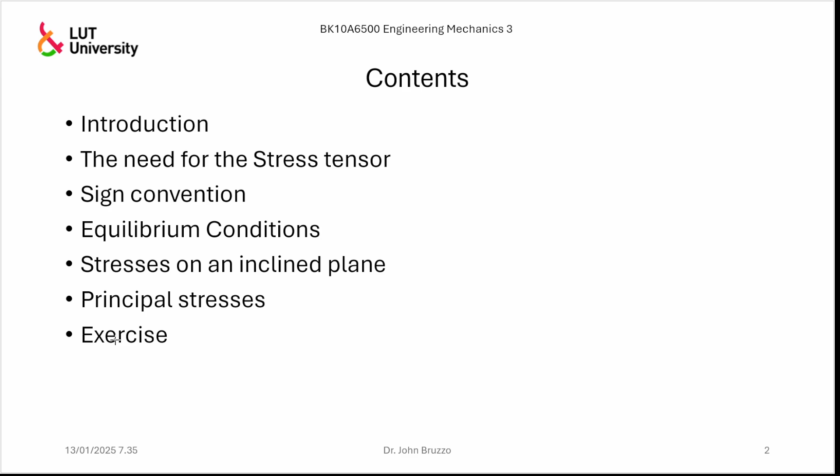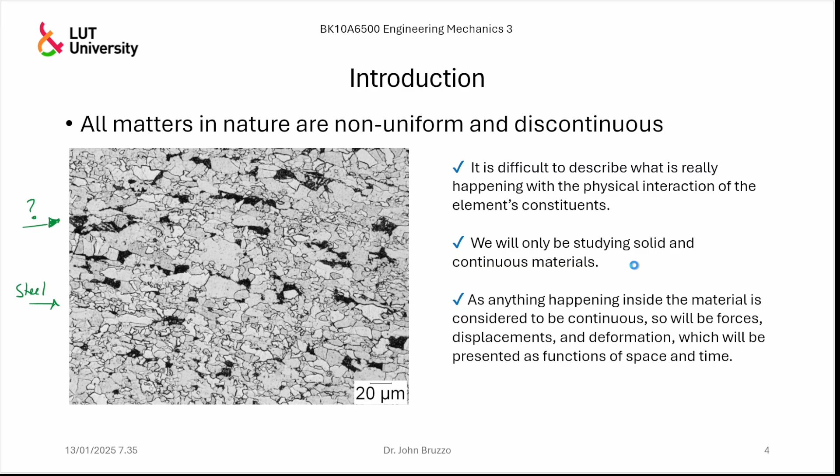And what you would do is cut a piece of steel, and let me see if I can pull up a picture. Metallography... let me see. Like this, yeah, this is a pretty good picture. I'm going to put it temporarily here.

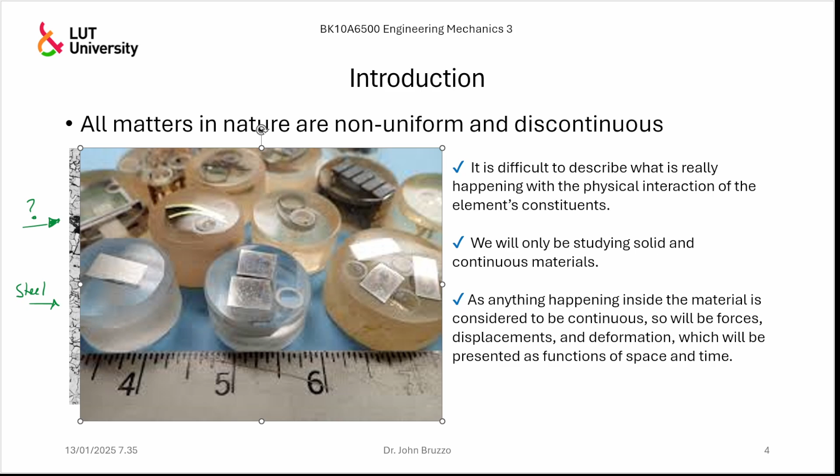So you would cut a piece of metal, the one that you wanted to study, and basically cut it and embed it in this resin, an epoxy resin, and then polish the face, mirror polished. Then after that, you would put some liquid, some chemicals, a reactive, which is a kind of oxidating or corrosive agent.

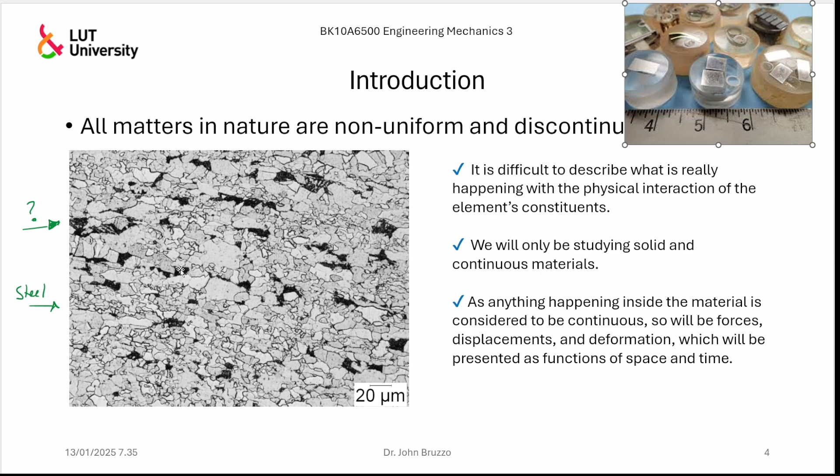And what you would end up with, after you put it under the microscope — yeah, my computer is lagging a little bit, we put it here, nice — it would be something like this. So this would have different shapes, typical shapes, typical sizes, and you have these black parts here, these small lines. If I make a little bit of a zoom... no, I cannot zoom it.

Actually, I lost it, if I go up or down. So a little bit of these kind of things.

So these kind of gray areas are called grains. These are the grains of the material. This is what forms the material itself.

And then these spaces are called interstices or something like that. And you can see that a material is not completely continuous. So all matter in nature is not uniform and is discontinuous. So what we see as steel, as a shaft, as a beam, as any machine element, at a microscopic level is something like this.

Yeah, so it's not continuous, which means that this may be a little bit difficult to understand what's happening with these materials once affected by a load, a moment, a torque, or something like that. So you just start getting the grip of it.

More interesting about this process is that depending on the thermal treatment that you apply to the steel, you're going to have larger grains or smaller grains, and depending on the size of the grains, the size of these impurities, you're going to have certain characteristics on the steel that determine, for example, the strength of the material, the elastic properties of the material, and so on.

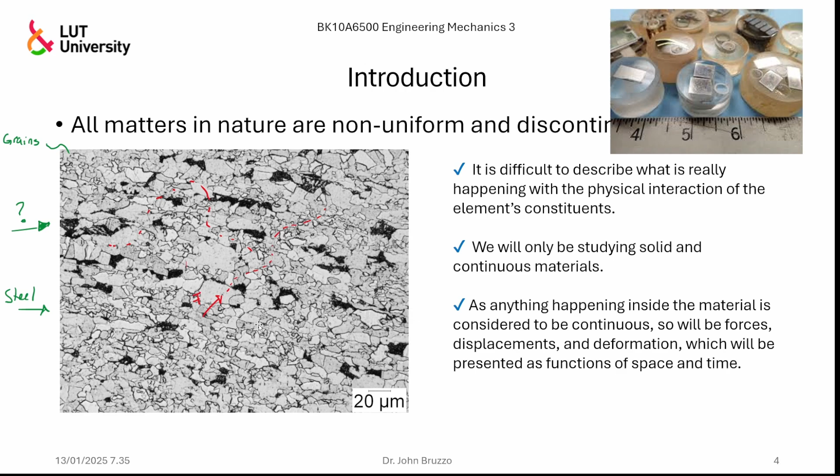But now the question is, okay, I made those assumptions to reduce complexity, but how then can I predict that something is going to break or not if I'm neglecting the obvious fact that this is not continuous? Well, then we jump to something called the phenomenological approach of studying things.

So what engineers are interested in is something called rheological properties of the material. Rheological behavior is basically the capacity a fluid has to deform or to flow. But then when you apply this to metals, for example, you're basically saying what's the capacity of this steel, this solid part, to deform. We can take the rheological behavior of a fluid and decontextualize it, applying it to a solid.

But now, the phenomenological approach means, let's imagine you have a black box, which is your machine element, the part, the shaft, or anything. And then you are going to apply some loads, one force here, another force here, and maybe a moment around here. So you don't know what happens inside of this.

But then what you have to do is ask, what are the consequences of this? What are the consequences of applying those forces? Is this going to deform or something? Well, if it's going to deform, then you can see right away what the consequences of these forces are. So the phenomenological approach means it doesn't matter what happens inside. What matters are the consequences of the forces in a visible way.

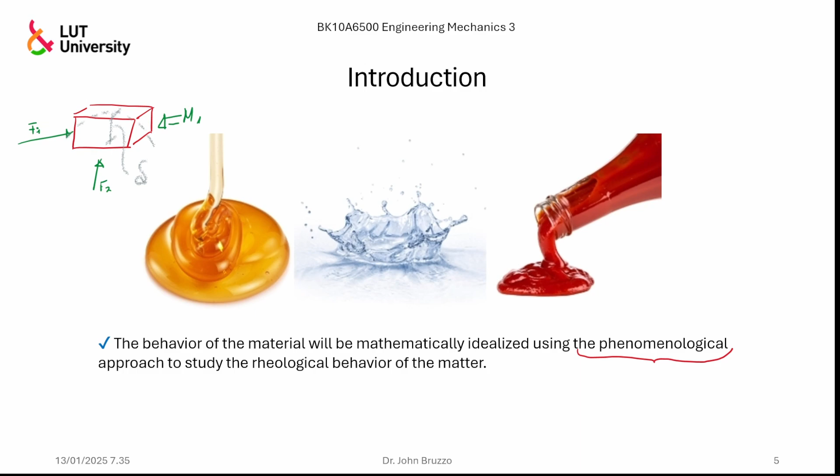This is a pretty fine picture, let me bring this one here. A couple of pictures I'm going to bring. This one is too big, so let's put it like this. This is a tensile test performed by this machine, or a machine of this type. Let me bring the machine, this one here.

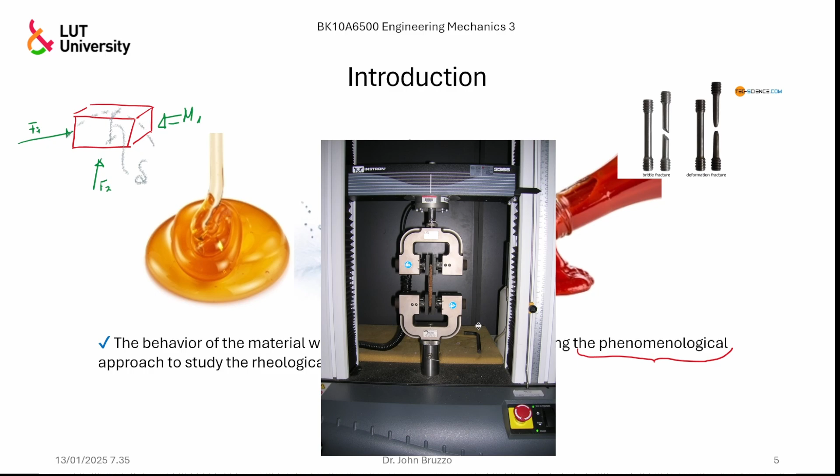So you put this test specimen in between these two clamps, and then you start pulling apart those two clamps until it breaks. Depending on the type of material, whether it's brittle or ductile, you're going to have a different type of breaking.

But just by looking at that, I apply some forces to this test specimen. For example, tensile would be a tensile force here. So I apply a certain amount of force, and it failed like this. They broke, and we say this is what's going to happen. So this is the way we engineers approach many things when we don't know what is exactly happening inside of the piece. That's what we call the phenomenological approach.

Do you guys have any question before moving forward?

So this is the way we approach things, or many of the things. And I don't know if you have noticed this, but this is a pattern that keeps repeating in your courses, that well, we don't know exactly what's happening there, but we do know that when we do this, this happens.

Now, this state of stress is represented by something called the stress tensor. But then I don't know if you've had a chance to see what is a tensor. And basically, when we try to describe numbers in our mathematics applications, we can deal with scalars, which is just a number.

Now, when we talk about vectors, it's kind of like we are augmenting, increasing the information a number can give us. For example, this gives us just a number, but vectors don't only give us the number, they give us something else, like: this rocket is traveling at 1,000 kilometers per hour, and not only that, it's traveling in this direction. So it's kind of, if this gives me the name, this gives me the last name. Name and last name. So imagine, look at that. This is the way it is represented.

But then we got matrices, which is kind of like if we group a bunch of people and say, well, this is John and this is the last name, this is Tommy and this is the last name, this is Joseph and this is the last name. So you start piling together vectors.

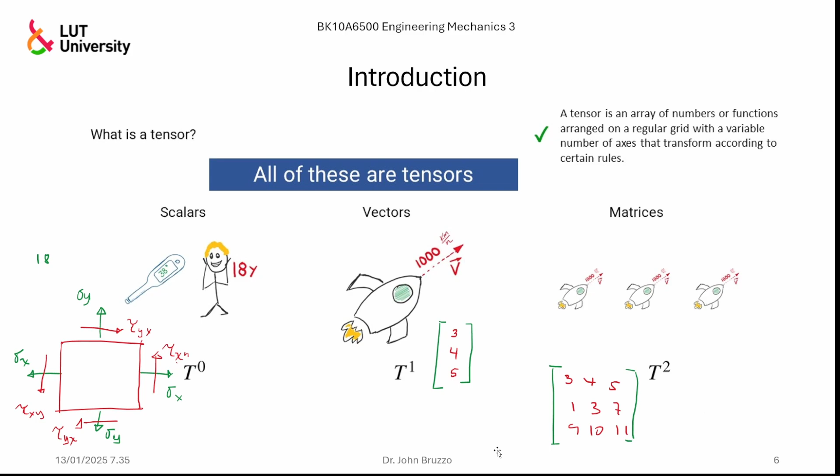So why are we taking a look at this? Is this important? Is this something that I might use in the future? Well, if you're going to work in design regarding mechanical engineering, or your work in the future is going to be involved with research of failures, or designing mechanical things, you need to know a little bit about this. As I mentioned in our last class, we need to be aware if something is going to break, or if a material is going to fail.

I define for our course, you can take any other definition if you want, but the one I choose is that something is going to fail if it breaks or if it deforms beyond usable range. If it breaks, obviously that's not going to work any longer. But if it deforms, the integrity of the part might be okay, but it might not be usable at all.

And what do I mean by that? Because we have a body of standards or situations where we can say that if the deformation is more than this, then this is not going to work. And what do I mean by this? So let's imagine that we have...

Let me see, a beam. So there's a beam here. I should try to use the ruler so it makes a little bit more decent lines. So imagine that you have a beam here, like this. And this beam, doesn't matter how it's supported, but it's supported somehow to the ground. So let's say that this is a simply supported beam.

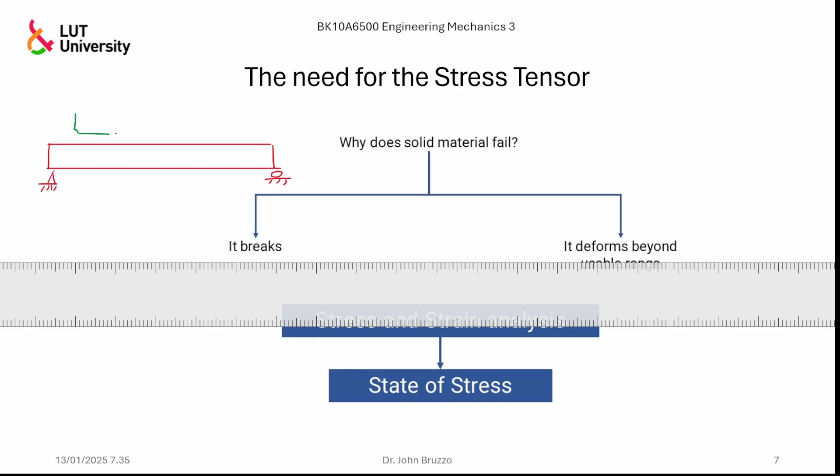And let's imagine that on top of that beam, which is part of a floor of a factory, you have a motor. I'm going to try to draw a motor here, electrical motor, something like this. This is the shaft. Then you have a coupling, something that couples the rotatory movement of the motor with, maybe, let's put it this way, maybe a pump, a centrifugal pump. So something like this, and this is a motor, and this is a pump.

And this is part of some design you're doing. But what about when this motor, let me write a little bit more here, has some vanes that help with heat dissipation, and then you have this one here. We move this just a little bit, I just wanted to move it like this. Yes, and then I have this one here, there's a pump.

So what about if when you mount this equipment on the beam, plus the other equipment that might be there, this beam deforms like this, where if I make this line like this — it's so sad I cannot add more of this — if this is the neutral line, so this is going to deform something here.

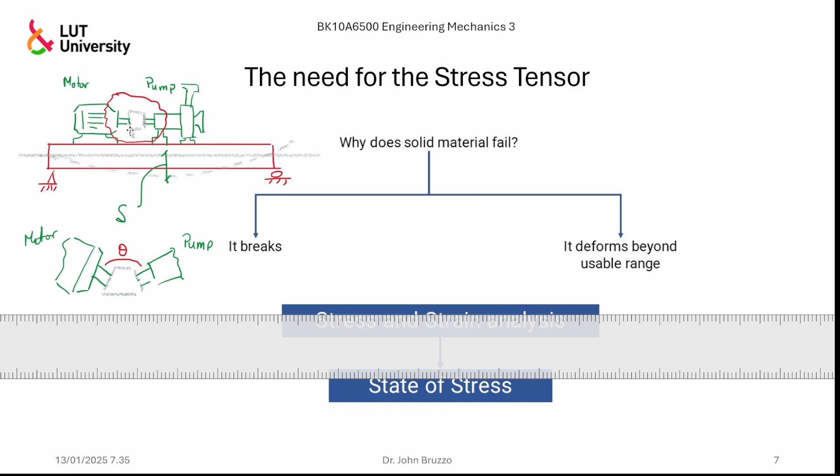So this is why I have defined failure of a solid material. If it breaks, you can see right away that it broke. But if the deformation is the correct one, it doesn't change the limits, it doesn't affect the functioning of the machines.

There's a body of standards that tells you, if you're going to calculate such beams and mount certain things, try not to exceed these maximum limitations. You have to take that body of knowledge - those are experiments, experience-based information that you bring in. You say, well, in the past this has failed, if it works under these conditions, we need to change it. So this is why we need to understand this.

And definitely this is a combination of what stresses are, strains are, and then that forms a state of stress. What questions do you have?

Let's continue. Let's continue then.

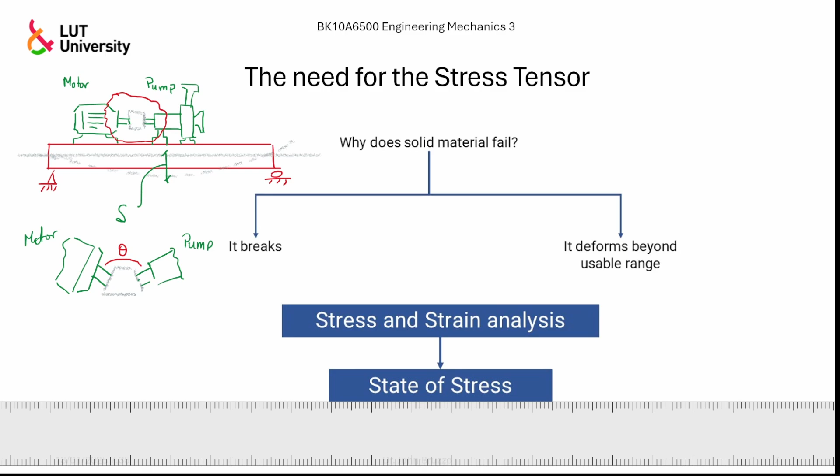And how do these react? Because these are internal forces here - these happen to be the internal forces that are keeping the material together. So how are they holding up? Are they strong enough, or are the forces larger than the ones they can support? This is why we need a stress tensor.

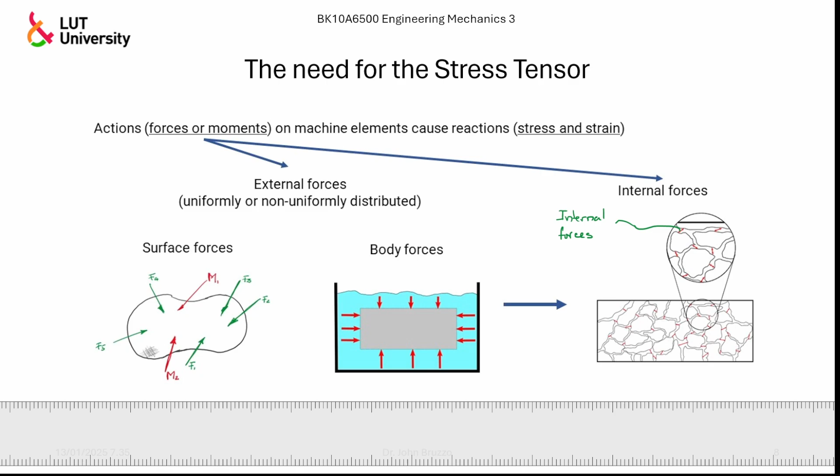And then you say, well, is this enough? Is this going to fail? To understand if it's going to fail, I need to go to the inside of the material and pick a point and see if this is going to fail or not. I need to see what the stresses are at any of these points, in here, or in here, or here, or any part. I need to check if the stresses generated or developed in any of these points is larger than the strength of the material, and then the material is going to fail.

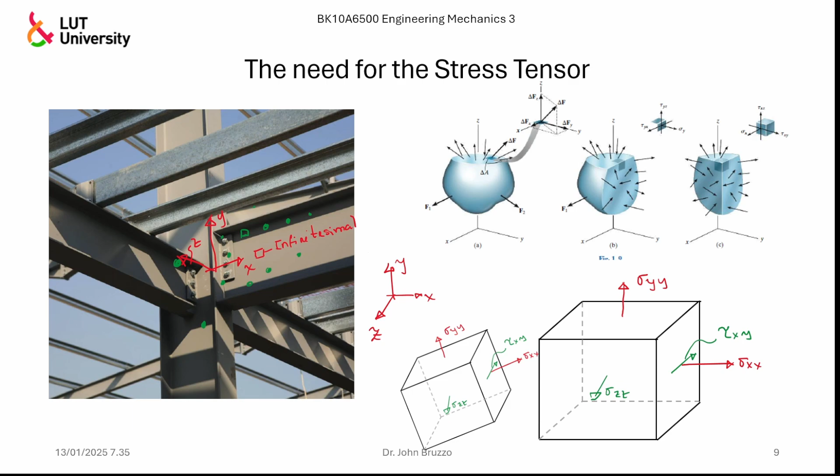This one here, copy image, and then this one here. So we start using software, and this software, for example, finite element analysis. This is instead of a support, or kind of a pin handle, or something like that.

And then what you do is start dividing the part into different points. So each one of these parts is a point where the finite element software is going to calculate stresses. Yeah, these are points.

So you say, well, why is this? Well, you know what, these are points, but you don't need that many points in this area because this part won't probably fail here. But please put more points in these areas, because this is where most of the time this fails. So you want to make sure that you get the point.

And then this can be as dense as possible, meaning you can put millions of points here and run the software. And not only that, the beauty of this is that between two points, if you study finite element analysis, there is something called interpolation functions that tell you, more or less, the stresses can be approximated between two points if we consider that this happens and so on. So you can have a guesstimation of what the stresses are in between points.

And then you get these beautiful images. Let me bring another one, for example. Yeah, this looks nice.

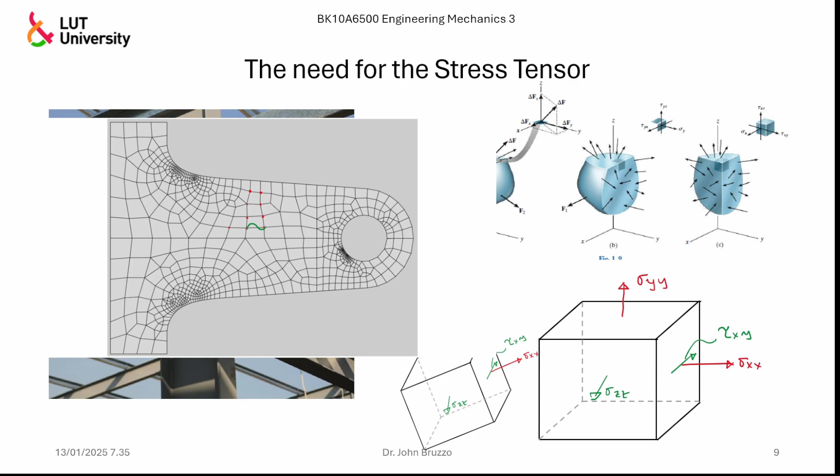Copy image, let me get rid of this one. Something like this, you see, where you are color coding - for example, red is where the most stresses or deformation are, and so on. You see, for example, in this case, near the hole here, and then this part, maybe because this is being bent or something like that. So we start using that, and then we start delegating this whole thought process of where should I calculate stresses to the software.

You would tell me, but then why do we need to learn this part if we have software that can do it right away? Well, the reason for that, my friends, is that if you don't know this theory, you could be assuming and trusting blindly on what the software is doing, and then whatever results the software tells you, you're going to consider is the truth, which means that you are prone to make big mistakes.

For example, something advanced I hope you get to see in master studies if you continue with more research: depending on the type of forces applied, depending on the type of machine element, certain meshing - this meshing is the process of dividing this into points, like doing this is meshing - are more prone to tell you the truth than others. And then, for example, these triangular elements here can have problems with this type of application, which is going to tell you only half of the truth, and then you are going to blindly select this.

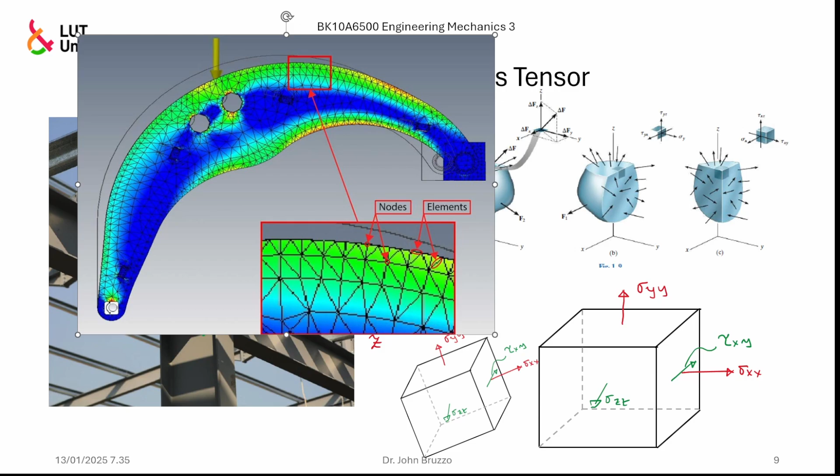So that's why you need to know a little bit of theory before jumping into software blindly to judge my calculations. So we need to do it by hand. And the good thing here is I'm going to tell you, do it here, do it there, and then you don't have to be guessing where to do it. Any questions so far? None?

Then how do I transform this into a tensor, a stress tensor? So imagine that we have this element. I'm going to draw this one here. So I have a normal stress pointing out this one here. I'm going to call it 10, and then I'm going to call this one 20. I'm going to call this one 30.

I'm not going to use any units. It could be megapascals, it could be kilograms per square centimeter - any stress or pressure unit can be used here. So, but I'm not going to write them down here.

Then, of course, because of the symmetry of all of these, they're going to have 10 also here. And at the bottom, you're going to have also here, you're going to have 20. And then in the back, like this, you're going to have 30. You see how this has to be in equilibrium - this is something we're going to talk about in the next slides. So this equals this equals this, and this equals this, because as this is a static structure, it doesn't move anywhere. So even though these stresses on this area represent a force, you cannot have different forces, because then it would mean that this might move and this is not moving. Even though there are certain considerations where definitely there is a difference between this and this.

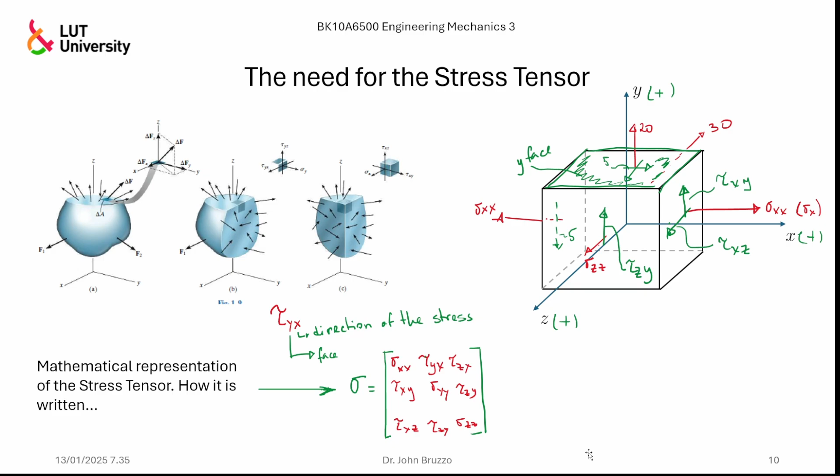It's pretty simple. Whatever is contrary to these two things are, let's say, negative. Why is it here? Let me bring this one here to have it as a reference.

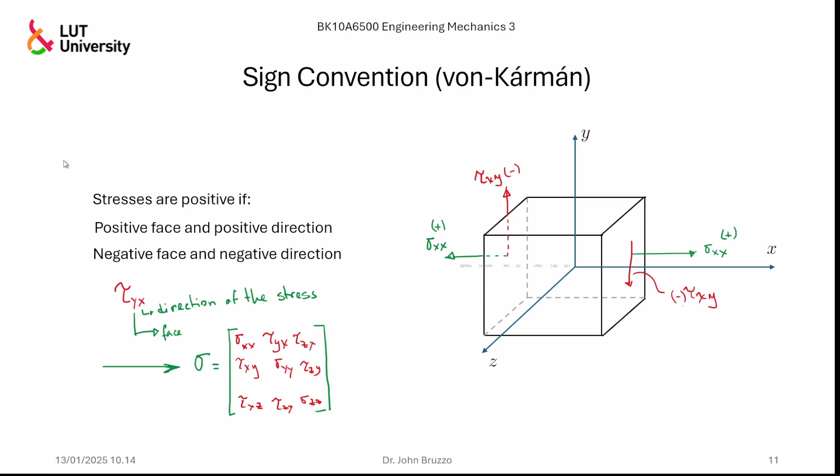So look at this, the arrows were pointing, look at the stress tensor, knowing that these, no, these dudes here. Actually, I should bring it again here, maybe. Yeah, I have it here. I'll also take into account this, right? So we can have everything in the same slide.

And see if this is the correct representation of this cube. You have just to answer yes or no. And you have 5 minutes since you start, so this is von Karman convention.

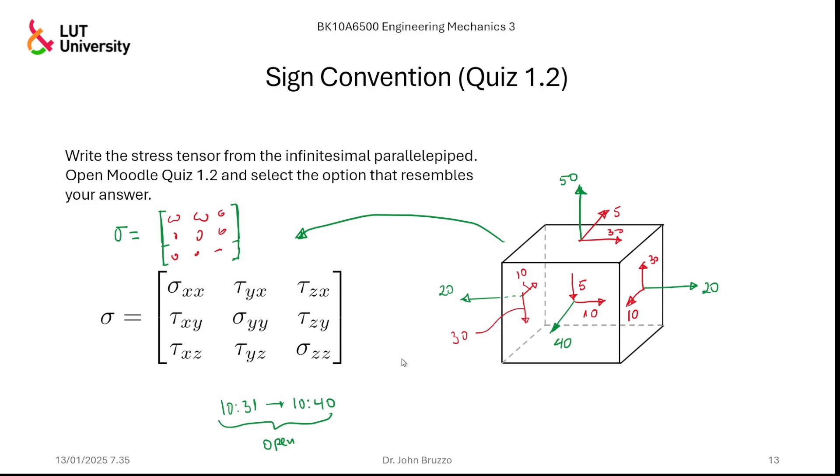Now, if we go to the second, let me bring here the image. You had something like this.

I hope nobody wrote down letter E because actually it does exist. Let me see... just two people got it wrong in this one. The rest got it perfectly. Nice, let's see.

Actually, the answer I believe is the first one. Why? Because this is sigma x, which is this one here. This is sigma y, positive, this one here. This is sigma z, which is positive, this one here. So perfect.

This one can match that one. This one matches that one. These two do not match the diagonal terms represented by the normal stresses. So these are a no. These are not possible, and these for sure are not possible.

Now let's take a look at the shear stresses. I know that these two are positive, but what about this dude here? This one is tau y z. Now it's in the positive face, but pointing in the negative direction, which means that this is negative. Look at this, and this one.

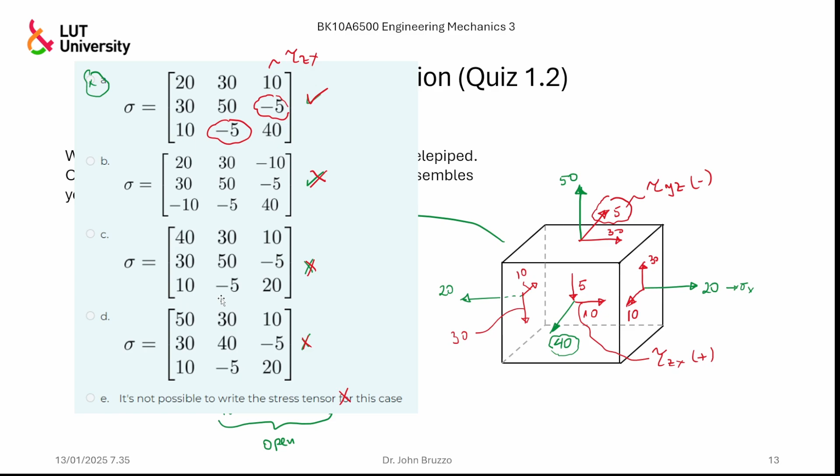Now, if you notice, let me bring back this, not this one, but actually I could take this screen capture of this one here. I can reuse this one. And let me crop it just to show what I want to show you.

I believe you noticed that when we talk about stress tensor, these terms are pretty much the same all the time. This term and this one are the same, and these two are the same also. So if you see patterns here, most of the time you see how these are repeating. For example, this one repeats here, this one repeats here, this one repeats here.

I'm muted. Thank you, thank you.

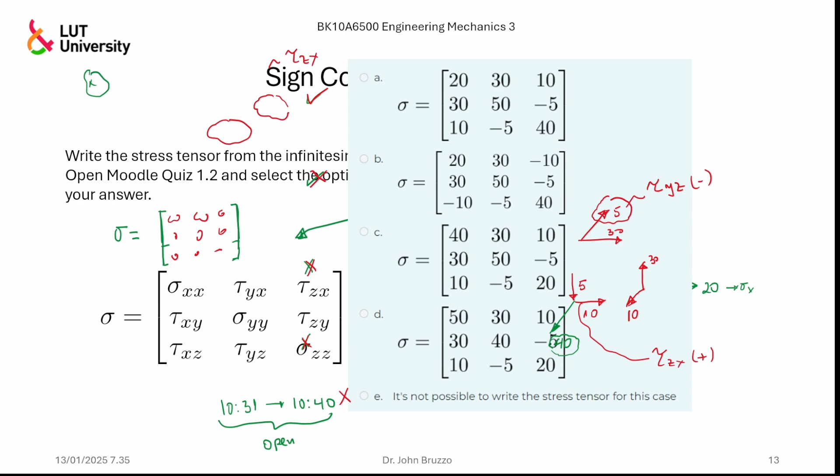Did you get to hear this explanation? I hope you did. Okay, perfect. Now, yeah, in this case, for example, these are a pattern that repeats in the stress tensor, which is that these two are the same, these and these are the same, these and these are the same.

And then I was mentioning that in this case, you see how the pattern repeats, that this one repeats with this one, repeats with this one, and then this one repeats here. So this is characteristic of a stress tensor. This value repeats in different parts of the representation of the stress tensor.

And that is thanks to something called equilibrium conditions. So when we apply rotation equilibrium and translation equilibrium, a few extra pieces of information appear. For example, if we apply rotation equilibrium - by the way, I'm going to leave a link to a video where the detail of everything is posted, if you're interested. I believe at this point it's not that interesting for you to know the minimum detail of things, but the most important things so you can apply them.

But even though the video is there, I did it for last years and previous years, and I noticed that it was too much. For example, if I take only the stresses that cause forces that can make this cube rotate about the x-axis - in this cube, only these stresses, this stress here.

For example, if this is the x, this one here is the y, and definitely this one here is the z. I call it dz because they are so small. This dude here, this friend, produces a force. Let's call it force zy, which is going to be that stress multiplied by dx and dy.

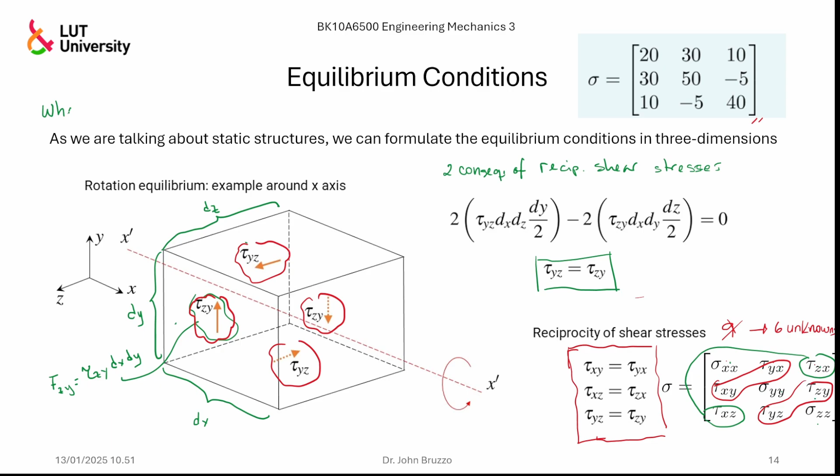What are the two consequences of the equilibrium rotation, or rotation equilibrium, in the stress tensor? Write it down because it's coming. So what are the two consequences?

The first one, the reciprocity of shear stresses. And the second one, that instead of 9 unknowns, we need only 6. This is the way you need to answer it. Instead, when you see this on the exam, just answer: reciprocity of shear stresses, and instead of 9 unknowns, we need just 6. This is for the exam, so write it down because it's coming. Any questions?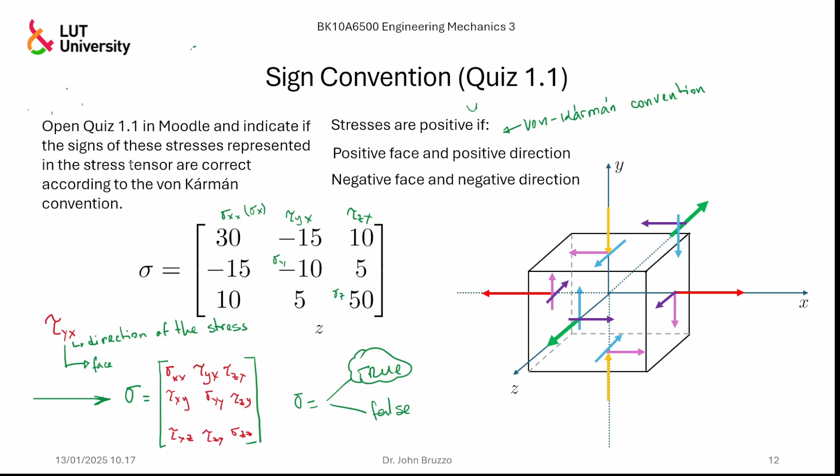Well, because in reality, let's imagine we're looking at a two-dimensional representation of this. If we consider this to be a point, we're going to have a stress here, and another stress here. But what happens with the adjacent point? Imagine this is the adjacent point, are we going to have this one here and this one here too, to follow the whole thing? So if we say these in reality do not change, like this... let me just get rid of this.

Then it would mean that for any structure, you would have to understand that the stress is going to be constant along the x-axis, and that's not the case. So if this is point 1...

And this is point 2, then if the stress increases from one point to another, most probably there is going to be an increment here, represented by this differential, which is going to be represented here with a different stress. So across the points you chose to analyze stresses, there are going to be differences in the same direction, and thanks to those differences we get what's called the differential equations of equilibrium.

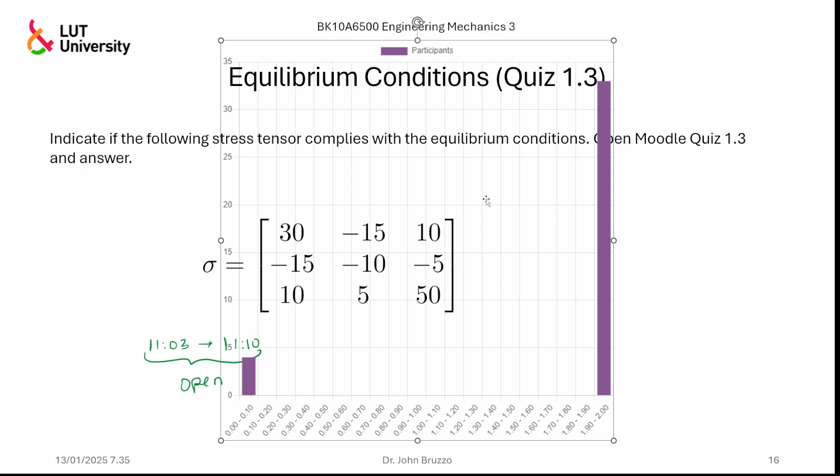All right, let's come back to this. And looking at the results, 4 people got it wrong, the rest did perfect. And the question was, just indicate if this tensor complies with equilibrium conditions.

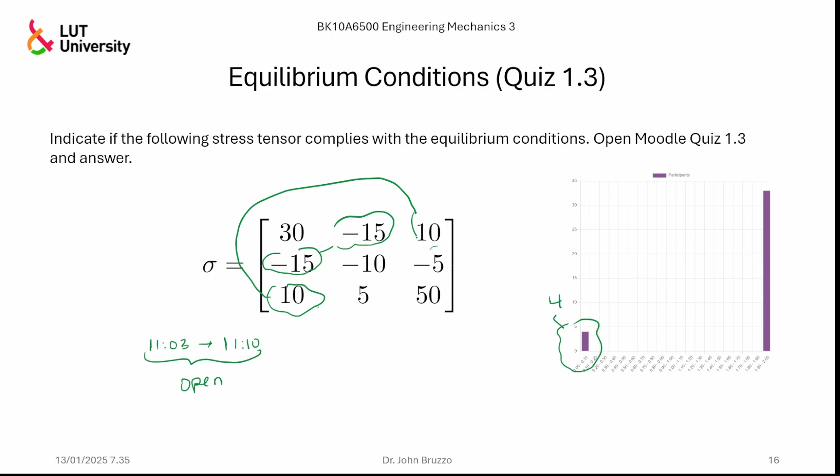And basically I mentioned, well, we're talking about rotation equilibrium. That's why I showed this. And again, this has to be equal to this, this one has to be equal to this, and this one has to be equal to this. And they are not, which means that this is false. This does not comply with the equilibrium conditions. It's just because these two numbers must be the same, and they are not.

So 4 people got it wrong. I hope you get the explanation why it's not true, why it is wrong. It's because of the consequences of applying the rotation equilibrium on a stress tensor, or on an infinitesimal cube, as you want to call it. So that's why this is false, because these two must be the same, and they are not, which means they do not comply with equilibrium conditions. Any questions?

Well, actually, there were more people answering, and 6 people got it wrong. Wow.

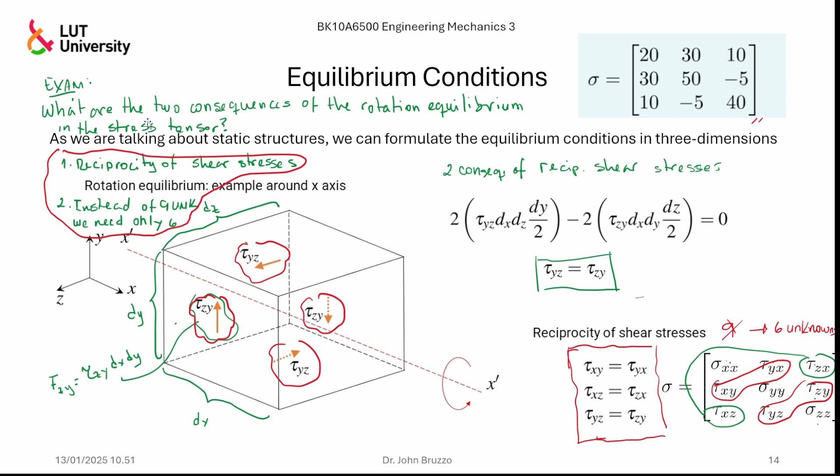All right, so let's continue. I'm already telling you this goes to the exam, so please write it down, because that goes to the exam.

We talked about representing this infinitesimal cube oriented parallel to the Cartesian coordinate system, but it could be oriented in a different way, and there could be infinite numbers of orientations. So why is that important to us?

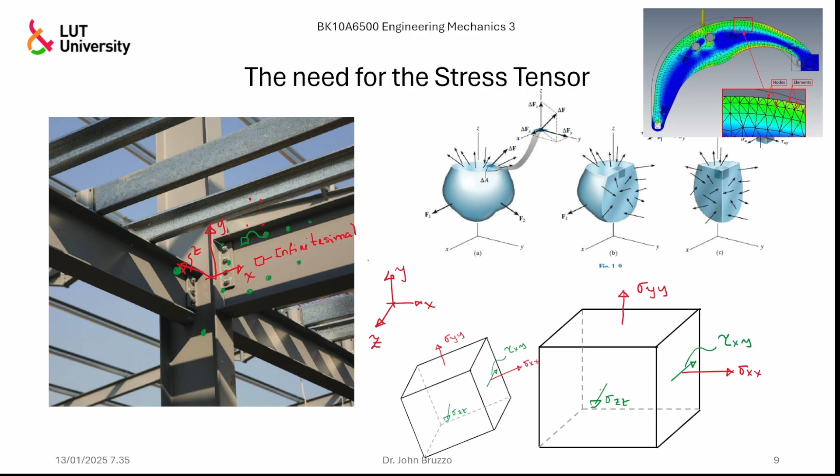To see the importance, we need to know how to express this stress tensor on a different plane than the one that we chose.

Imagine that you chose this stress tensor, let me copy it from here. One nice, maybe this one. Let me copy this one here. Now I want to paste it as a figure, as a picture, so I can shrink it if it allows me.

So I chose that one, but what if I wanted to understand what happens if I just cut this like this, and take a small piece of this cube, and try to understand what are the stresses after I cut this corner, the stresses formed in that specific plane.

That's the help of something called stresses on an inclined plane. There's more to it, and I will invite you to look for it. But not only do you need to know the orientation of the plane, but the orientation of the normals and shear stresses, and also how to represent that orientation.

Something we use here are these elements, this vector, called direction cosines.

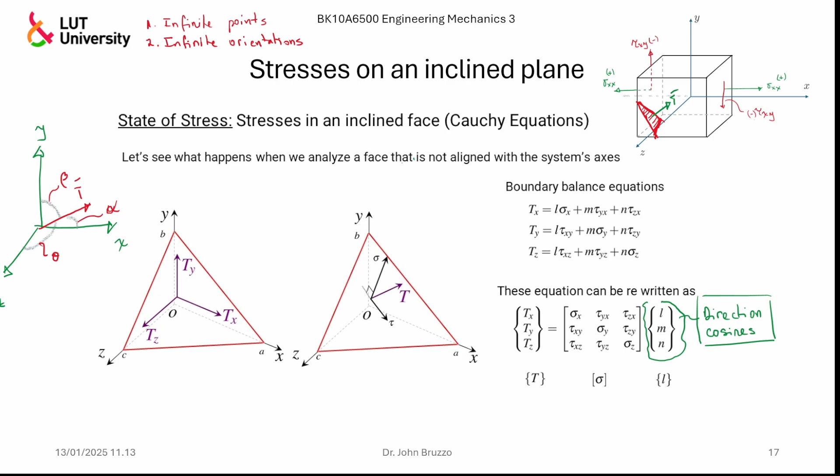Here there are so many that I cannot decide. Let's pick one. Oh, this is one. Imagine this is a brake assembly, with mesh and everything, and you're studying this part. So this is very complex, and I'm going to pick this point here, or in green to make contour. This point here, I don't know what's better, but this one.

Because you think when we're talking about analytical solutions, meaning doing it by hand, you think, well, I think that is where the maximum stresses are going to be, and I think that is where this thing is going to fail. So you pick this point, and then that point is represented by your infinitesimal cube.

But then you are left with the unknown. I know that's the place where it's going to fail, because typically this brake fails here, assuming this is true. But is this the correct orientation? Then you can start playing around with the orientations of this cube to see if these are the maximum stresses you can find at this point.

Because stresses, depending on how you orient this cube in space, you're going to get one value of stress or another. So this tool is allowing you to make sure that you calculate the maximum stresses possible existing at that point. So this is why this is very important.

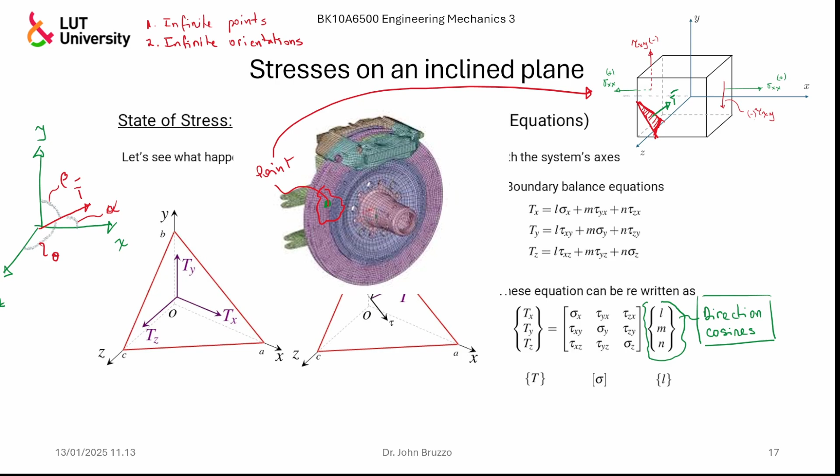Let me get rid of this and put it like this, in here. So that's why you not only want to pick the correct point, or the closest point to your assumptions about where the maximum stresses are going to be, but you also want to make sure the orientation you chose is the correct one. That's why this is helpful.

Then, of course, if you have a normal stress or a resulting stress, any resulting stress, you can transform that into a normal stress to the plane and a shear stress to the plane, using the projection of the resultant stress on the normal axis and the projection on the shear parallel axis. Applying these formulas is very simple in this way.

It's just a dot product of the vector you get here, multiplied by the normal direction, or the direction cosines representing the normal direction, and you get the normal and shear stresses in that area.

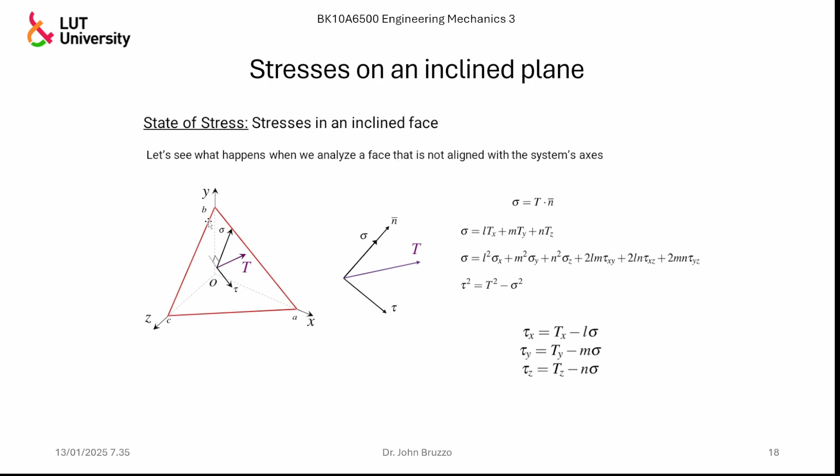But you're telling me, well, this is nice, but what's the point of this? It would be wonderful if I didn't have to go over a million orientations to see what's best, but if we could calculate, having this infinitesimal stress cube, what orientation gives us the maximum stresses. Because if you can give me the maximum stresses, you could take those values to the bank and say these are the maximum stresses, then use any failure theories we're going to see in the future to say if it's going to break or not. So that's why we need to make sure that at the point we're analyzing, we are getting the maximum stresses.

And that's where principal stresses come into play. Principal stresses are named like that because, first, if you have a stress tensor, I'm going to put it like this, the one that we already know: sigma xy, and I don't care about writing this in the correct order, even though I should, because I know the reciprocity of shear stresses is working in my favor, and this is yz. So this is my stress tensor that I calculated.

But there exists an orientation of that cube that, when you rotate it, transforms this into what we call principal form, a stress tensor of this form: sigma 1, sigma 2, and sigma 3. And all the shear stress values become zero. These are called the principal directions.

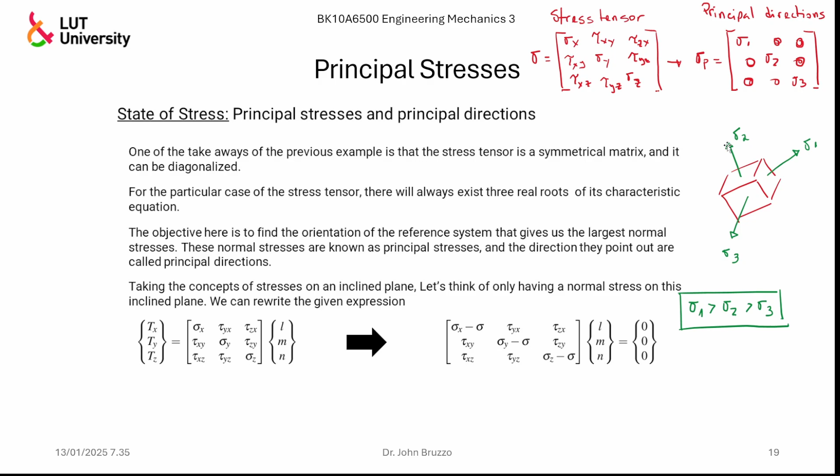How to calculate it? Basically, we know, and I believe it's written here, that the stress tensor is a symmetrical matrix. When I say symmetrical matrix, the lower half equals the upper half. That's a symmetrical matrix, and you can diagonalize a symmetrical matrix. They say it can be diagonalized, meaning you can find the principal directions. That's what it says. So how do we do that?

So I'm going to leave you this, but basically there is something called the characteristic equation of the stress tensor, that is this one. If you say, hey, I want to know what this vector is — this vector is a matrix like this, sigma 1, sigma 2, and sigma 3 — it has to be equal to this.

So it's kind of finding the solutions for this problem. Basically, if I put this to this side and subtract the matrices, find me the solution. Well, definitely the solution of this system of equations, meaning the values of these elements, is 0. It cannot be that these are 0, because one of the properties of the direction cosines is that they follow this rule, so they are never 0. So this is a trivial solution, it does not exist. The real solution is that the determinant of this matrix has to be equal to 0 to solve that system of equations.

When I form the determinant — and there is also a lengthy process on how to get to this equation — it says that you're going to find a cubic, or third-degree, equation where if you solve it, it's going to give you 3 real roots, meaning the 3 roots are always going to exist. So if you're calculating the principal stresses and get an error or some complex numbers, something is wrong. 3 real roots are always going to exist, and they're based on these variables here, I1, I2, and I3.

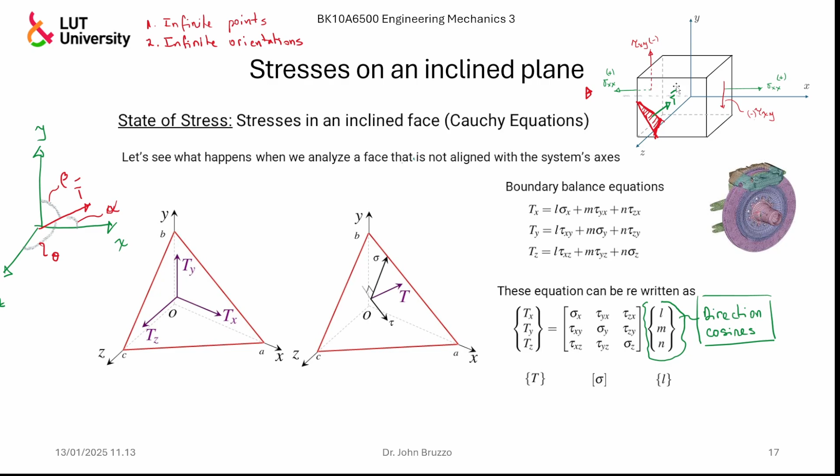All of this we've covered is just to tell you this: this is the way to know what are the maximum, the largest stresses at that point. Let's remember that a point is going to have these. If you change from that point to another location, this is going to be different.

Any questions so far?

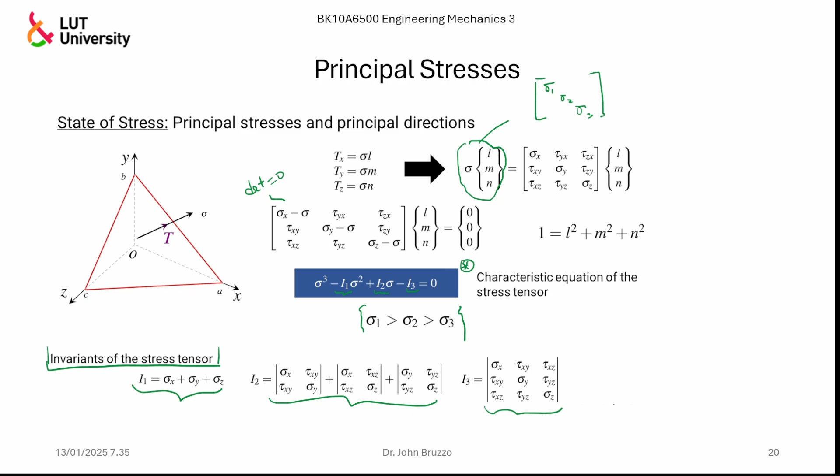So if you have a stress tensor that you formed by calculating the loads, the location, moments, and everything, you get to this stress tensor. And we will see how that's formed when we look at failure theories.

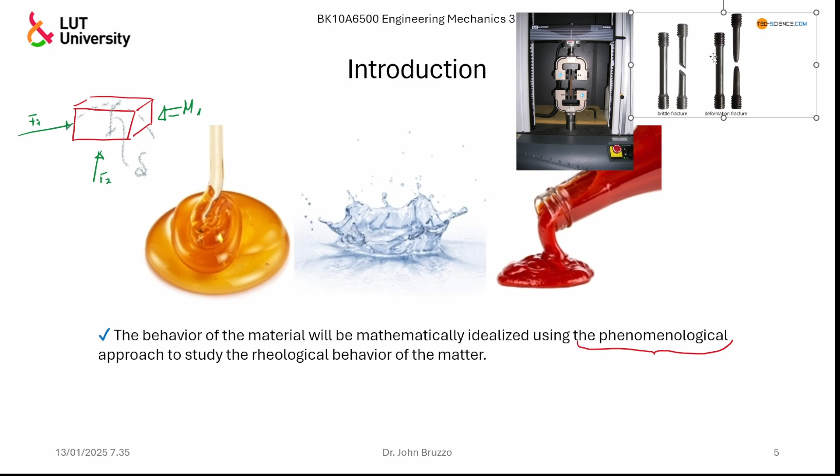One of the tasks would be to calculate the principal stresses, these ones here. Then, just to know the orientation and why the direction of those principal stresses is important. I bet you have seen this before when I show you this, but let's bring this image here.

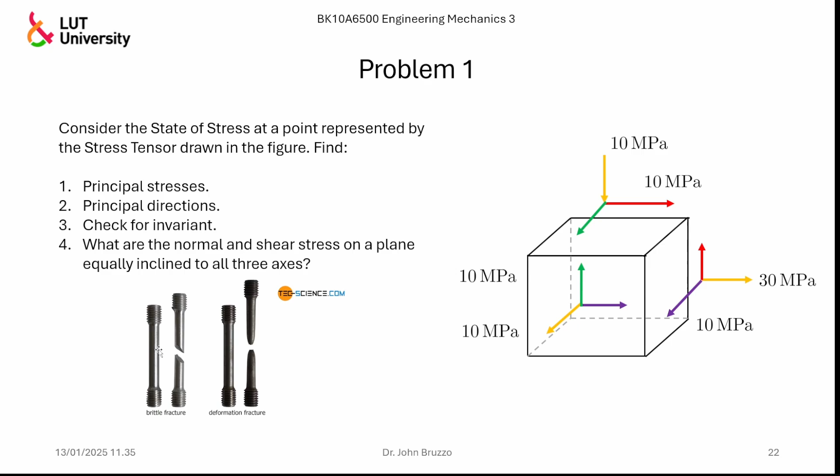Isn't it interesting that this piece of steel, in brittle fracture, always breaks at about 45 degrees? If you take this angle here, it's more or less 45 degrees. It always breaks like this if it's a brittle fracture.

Have you wondered why? Imagine that you took a point there and constructed your stress tensor here, and here, and here, with all of the arrows. If you find the principal stresses, that's going to give you definitely this family here.

If you find the orientation of these principal stresses, I'm going to draw it here, they're going to be oriented something like this, where the largest stress is represented in this direction. And this angle, how much is it? Well, guess what? 45 degrees.

Isn't this a beautiful concept? So why would you like to know not only what is the maximum, the largest stresses, but also the directions? Because you can infer how the thing is going to fail. Imagine you're using welding, and you want to guarantee that the welding is oriented properly so it withstands the largest stresses. So this is going to help you do this.

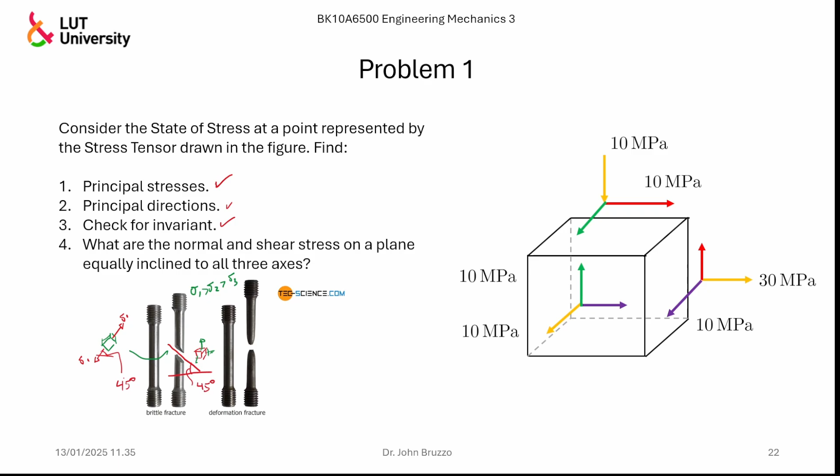But again, as a summary, it's not much. I mean, there is a lot of theory and concepts behind what we just saw here. But when you clean everything, when you just leave what is the core of what you need to know, it's that whatever point I choose, there will be the largest stresses depending on the orientation I pick. Yeah, this is kind of one of the things.

So to summarize: we already saw why we need the stress tensor, because it gives us the ingredients to calculate stresses and see if things are going to break or deform later, using failure or deflection theories. We saw what are positive or negative stresses according to the von Karman convention. We saw the equilibrium conditions in rotation and translation, and that rotation equilibrium gives us two consequences: the reciprocity of shear stresses, and that instead of solving for 9 unknowns, we need to solve for 6. Then we saw how to calculate stresses on an inclined plane, which gave origin to a formula that gives us the principal stresses. And with that, we finalize our class today.